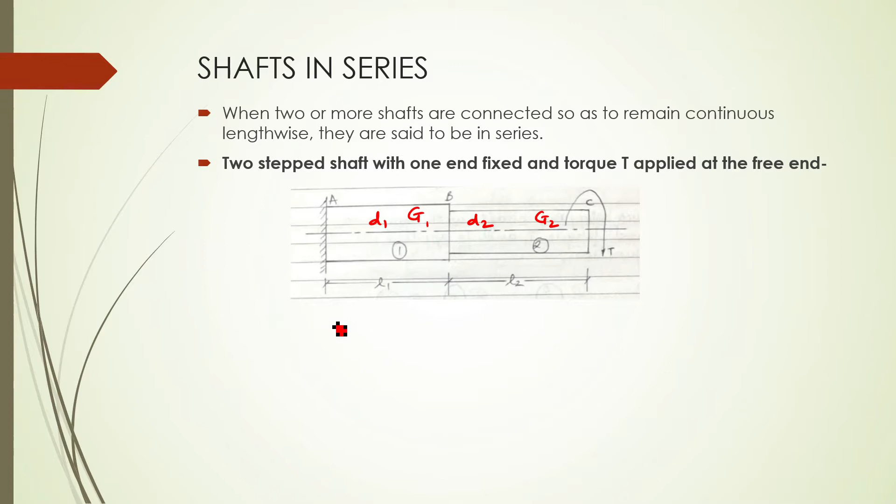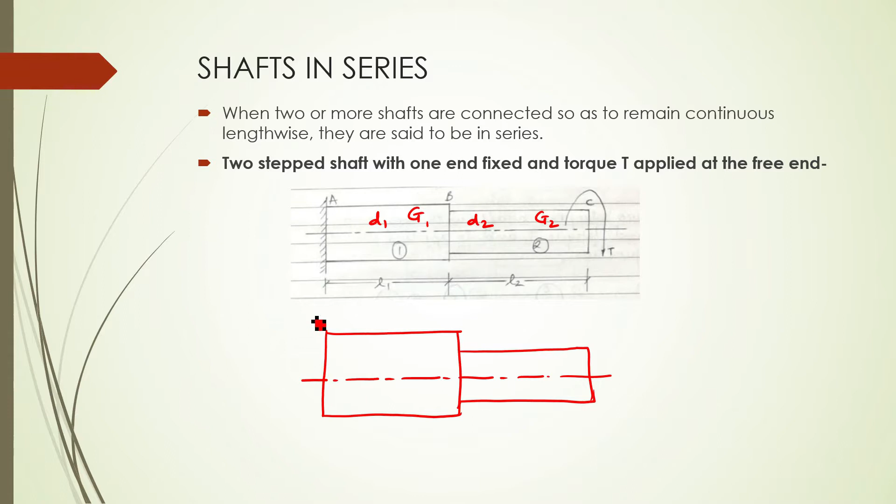Drawing FBD is very simple. This is my first shaft. And this is the second one. In FBD, we necessarily remove the fixed, hinge, roller and replace them with their reaction. In this case, when we have fixed here, I am going to remove the fixed and draw a torque, because at the other end I can see some torque T being applied. Let me say that this torque is clockwise. So the torque on this end is going to be of anti-clockwise type. So I'll write here counterclockwise.

This is A, B and C end of the shaft. This is my first shaft, second shaft. The length of the first one is given as L1. For the second one it is given as L2. Diameter is D1 and G1 is another material property that I know. D2 and G2. These are the properties known to me.

Now I want to write down certain equations so that if I have a numerical of this sort, wherein I have a shaft whose one end is fixed and on the other end I have some torque applied, I can calculate the torque exerted on the body if required. I can also calculate the angle of twist in the body and the shear stress generated in the body. The value of torque will be given to me. So the two things that I can calculate are twist and maximum shear stress. So we will see certain applicable equations for this case.

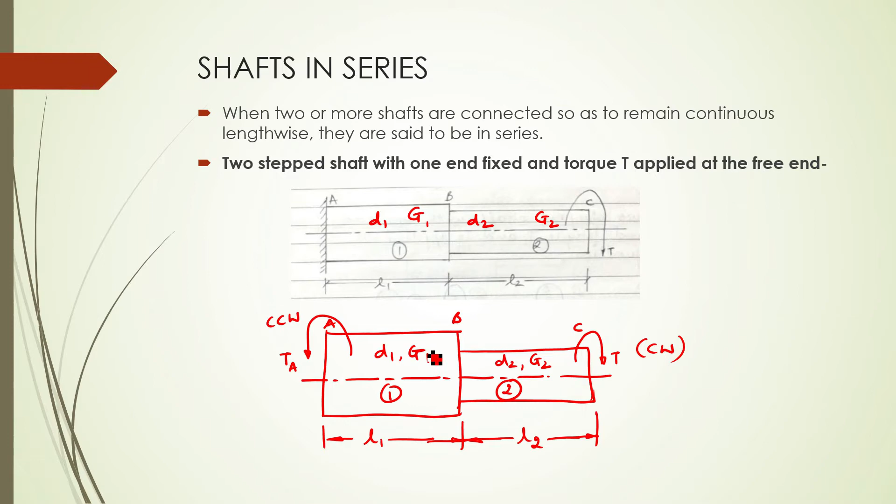The second equation that I can find here is about the twist. If you observe carefully, this entire shaft A to C will be subjected to a certain amount of twist, which will be the twist in portion AB plus the twist in portion BC. So theta AC for the entire shaft will be theta AB plus theta BC. Now we know the equation T/J = Gθ/L. So if I want to find theta, it will be TL/GJ.

When I substitute here, for the first portion this will be T L1 upon G1 J1. J is calculated as pi by 32 d raised to 4. Since the diameter is different for both shafts, I have to write it as J1 and J2. And for the second one, I'll write T L2 upon G2 J2. If required, I can take T common: T times (L1 upon G1 J1 plus L2 upon G2 J2).

Now, third, we are going to talk about the maximum shear stress that occurs on this body. First, we'll talk about the shear stress acting on the shaft 1. Now, let's recollect the equation: T by J is tau upon R. So, when I talk about tau, it is going to be TR upon J.

Now, this can also be written as T into R as D by 2 and J as pi by 32 d raised to 4. So when I solve this, this 2 and 32 gets cancelled. It is 16 which goes to the numerator, T upon pi d cube. This d and d raised to 4 gets cancelled. So this is the formula of tau that I can use.

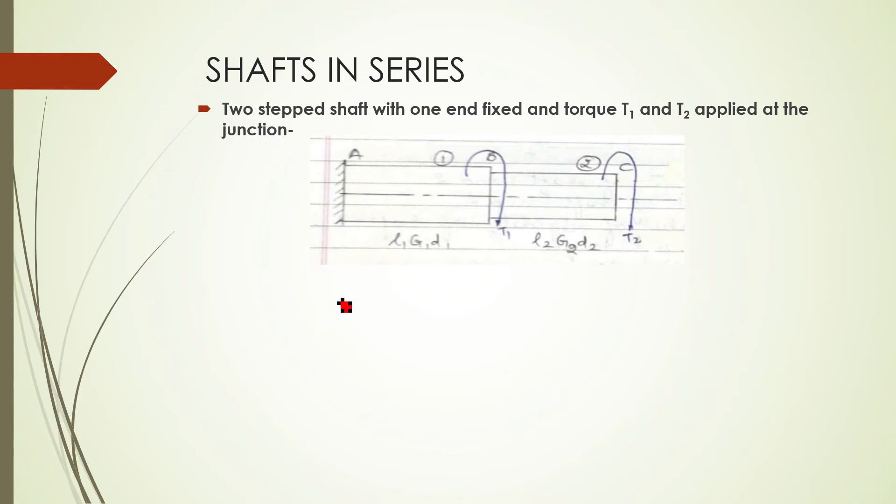So again I'm going to do the same thing. I'm going to remove the fixed end and draw a resisting torque. So this is my shaft 1, this is my shaft 2. At junction B, there is a torque T1, let me say it is clockwise. At junction C, again there is a torque T2, let me say this is also clockwise.

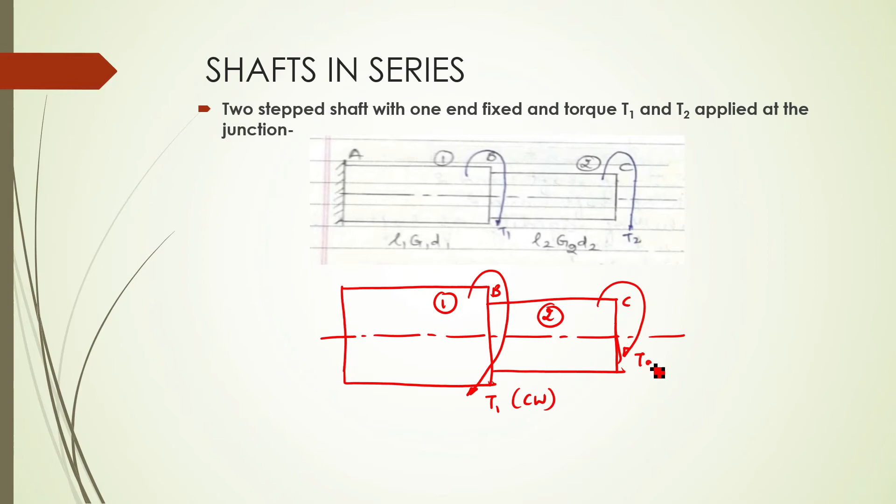So at junction A, I will obviously have to draw the resisting torque TA, which is say in anti-clockwise direction. The length here is L1, G1, D1 are the properties; L2, G2, D2 are the properties in the second shaft. Now let's write the applicable equation for this kind of a shaft. In the previous case also we did the same thing.

This torque TA will be equal to T1 plus T2. If you observe, I am using summation of torque over the entire body is equal to 0. So that is how I get this equation. That is, the torque over the entire body remains constant.

Next, I will talk about theta. When I talk about theta for A to C portion, it will be theta from A to B and then theta from B to C. The formula remains the same. So it is TA for the first shaft over here.

It is TA L1 upon G1 J1, and for the second one I can either write it as T2 or I can write that TA is T1 plus T2. So for the second one, I can write it as T2 L2 upon G2 J2. This T2, from here if you observe, can also be written as TA minus T1. So either you write here T2 or you can write TA minus T1.

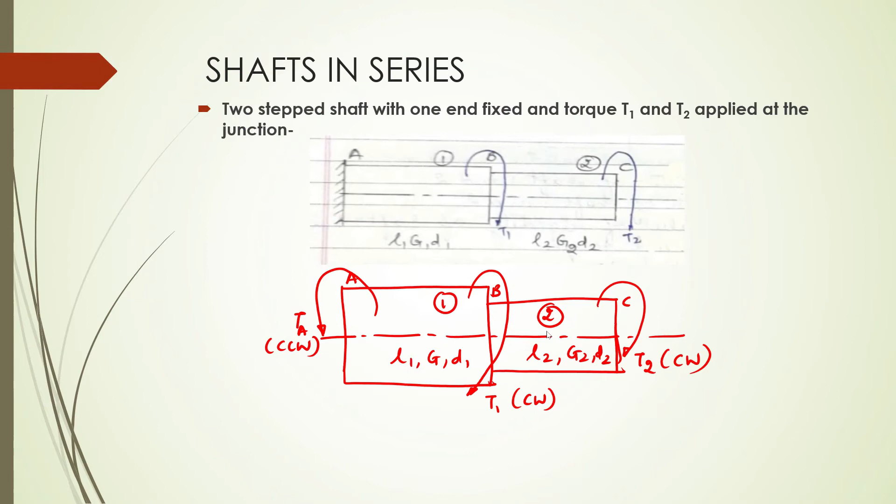Instead of T2 you can also write Ta minus T1, and instead of Ta here you can also write this as T1 plus T2. So either one of the two values can be substituted for torque. It is obviously going to be the same number. Here again you can see tau max 2 will be greater than tau max 1 because D1 is greater than D2. Next, let's go to case 3.

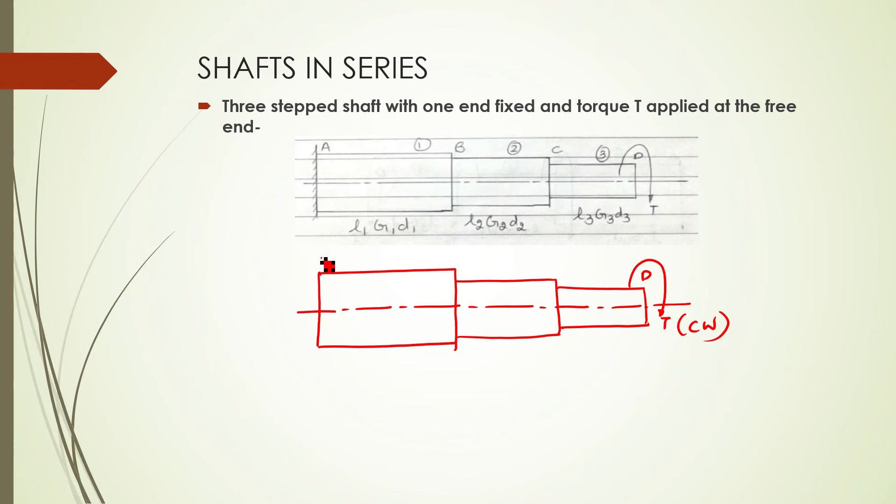Three-step shaft with one end fixed and torque T applied at the free end. So here you can see this is the fixed end and here the torque T is being applied. Now when you resolve this, you can draw the FBD. At end D, the torque is T, say this is clockwise. So at end A, there will be a resisting torque TA, it will be counterclockwise. This is shaft 1, 2, 3; L1, G1, D1 are the values, L2, G2, D2, and here it is L3, G3 and D3. This is junction B and C.

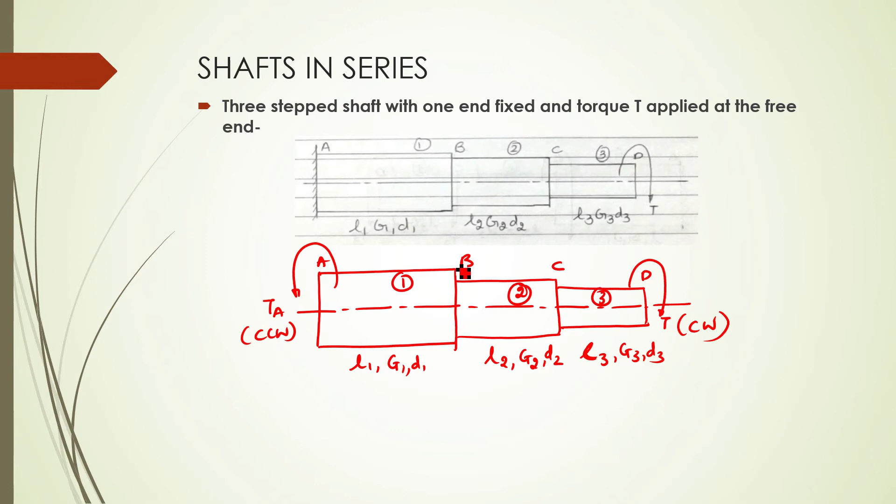Now let's see the applicable equation for this case. The first equation is TA is equal to T, because we know torque is constant throughout. The second equation is very important in this case. Just observe, the shaft is now from A to D. So the total twist will be from A to B plus twist in B to C plus twist in C to D. So I can write theta A to D is theta A to B plus theta B to C plus theta C to D. Theta will be TL upon GJ. For the first one, it will be L1, G1, J1. This is L2, G2, J2. And for the third case, it will be L3, G3, J3.

And for maximum shear stress, by now you know it, it is 16T upon pi d1 cube. For the second shaft, it is going to be 16T upon pi d2 cube. And for the third one, it will be 16T upon pi d3 cube. Now if you observe here, the third diameter is the smallest. So I can say very confidently that tau max 3 will be greater than tau max 2, which will be greater than tau max 1 for this case. Next we'll go for the last case for shafts in series.

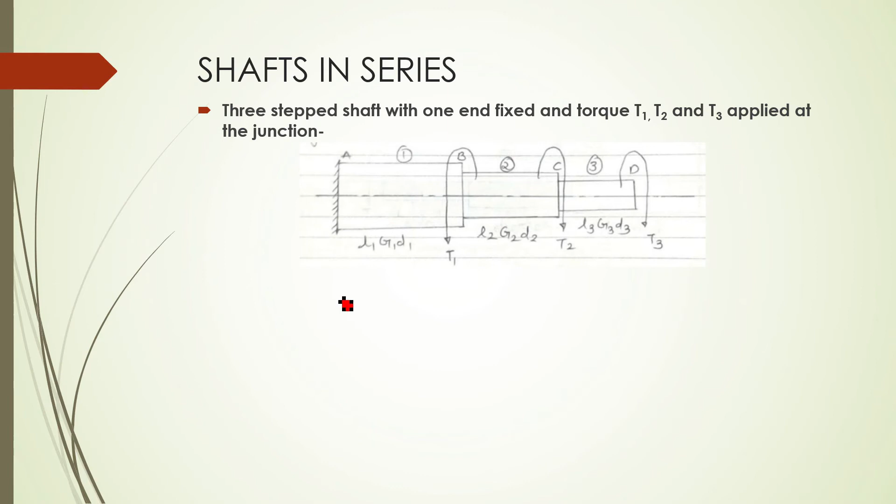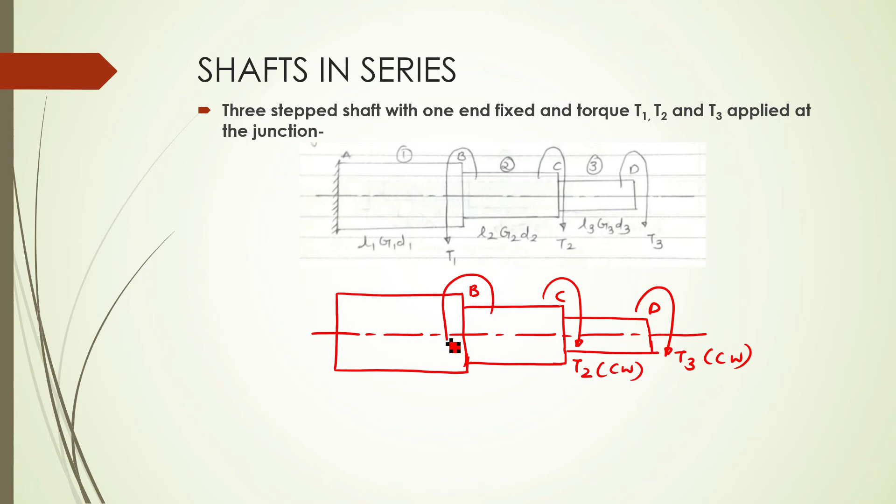Three-step shaft with one end fixed and torques T1, T2, T3 applied at the junctions. So I will again draw the FBD. At junction D, the torque is T3. Say this is clockwise. At junction C, say the torque is T2. This is also clockwise. At junction B, the torque given T1 is say counterclockwise. At junction A, I will assume the torque TA to be counterclockwise. It depends on the total value, the summation. Whatever value you obtain, you can accordingly adjust this sign. This is shaft 1, 2 and 3. The parameters are L1, G1, D1; L2, G2, D2; and here it is L3, G3, D3.

Now let's see the applicable equation for this case. The first equation that I'm going to use is summation of torque is 0. Now TA and T1 are in the anti-clockwise direction, so let me take them as positive, and T2 and T3 are in the clockwise direction, so let me take them as negative. So here I'll have TA plus T1 minus T2 minus T3 is equal to 0. So you can observe TA plus T1 will be equal to T2 plus T3. These two shift to the other side. So this is one equation that can be used to calculate any unknown value.

The next equation that I'm going to use is for theta. This equation by now is very much known to you. Theta A to D, from the start to this end, will be theta for the A to B portion plus theta for the B to C portion and theta for the C to D portion. Now, when I talk about the first shaft, you can see on one end the torque is TA. So on the other end, I can calculate the value by using this equation. TA will be T2 plus T3 minus T1. So this is one equation that I can use here.

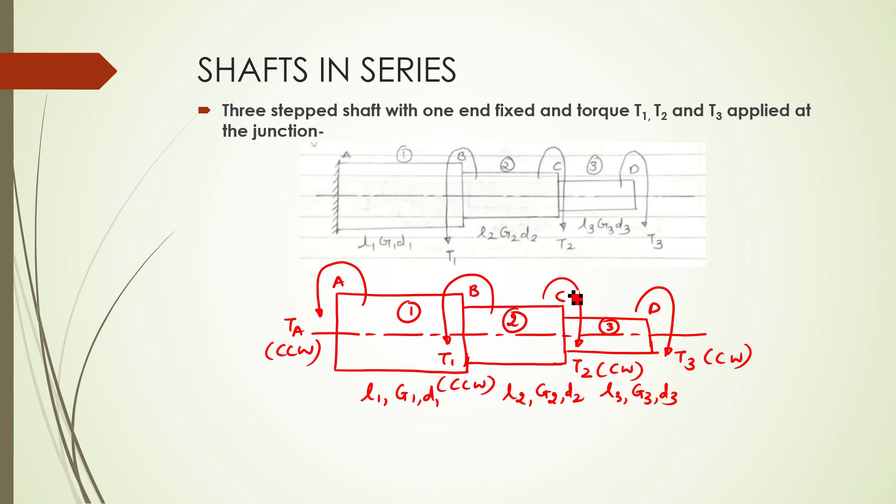Now you must be wondering how I'm thinking about this value of torque standing here. It is by using the principle of superposition, which we have already used for forces, when I can pick up a force and assume its effect over here at this junction as tensile or compressive. If you can recollect from the lectures of simple stresses and strain chapter, obviously we can do the same thing for torque. That is, standing at this junction, I can assume that this torque will have some effect on this junction. So this is one formula.

And last formula that is very much known to you is of tau max 1, that is 16. Again you can use the torque value from here, this value TA or this value. I'm writing TA for the first one upon pi d1 cube. For the second one, tau max 2, let me take it as 16 (TA plus T1) upon pi d2 cube. And for the third one, tau max 3, say I'm using this T3, 16 T3 upon pi d3 cube. If you want, you can use this equation instead of T3 as well.

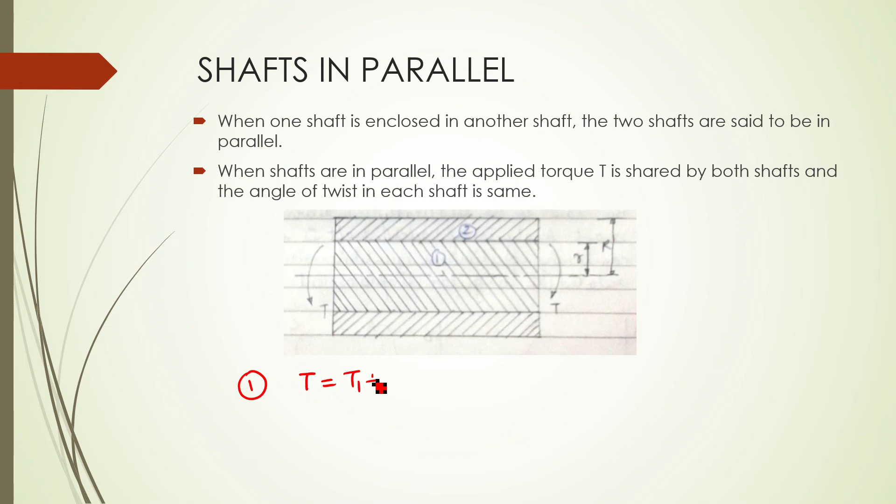So I'll write the first equation, that is this torque T will be T1 plus T2, where T1 is the torque resisted by the shaft 1 and T2 is the torque resisted by shaft 2. So this is how you calculate torque. Next equation that we are going to write is for theta.

For this case of parallel shaft, theta, that is the total twist, will be equal for both the shafts. So here it will be theta 1 equal to theta 2, where theta 1 is the angle of twist in shaft 1 and theta 2 is the angle of twist in shaft 2. And calculating theta is very simple. It is TL upon GJ. So theta 1 will be T1 L1 upon G1 J1 and theta 2 will be T2 L2 upon G2 J2. Now here you can observe that this value of L will actually be equal for both of them.

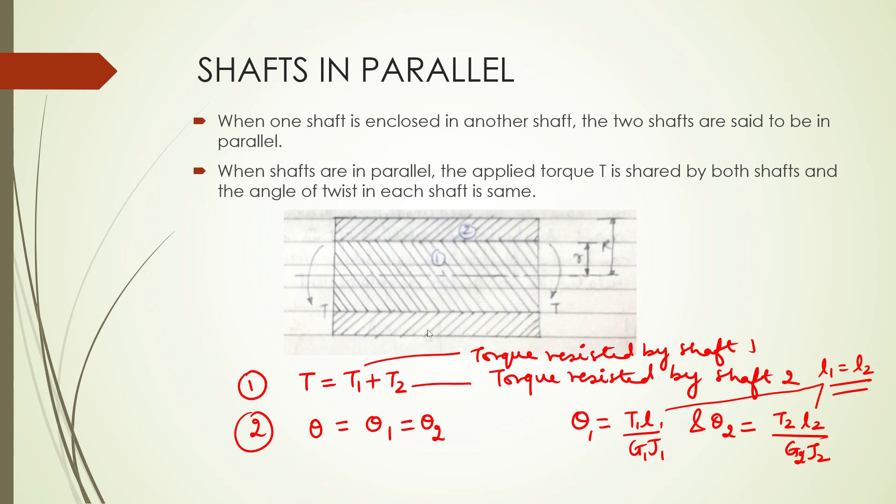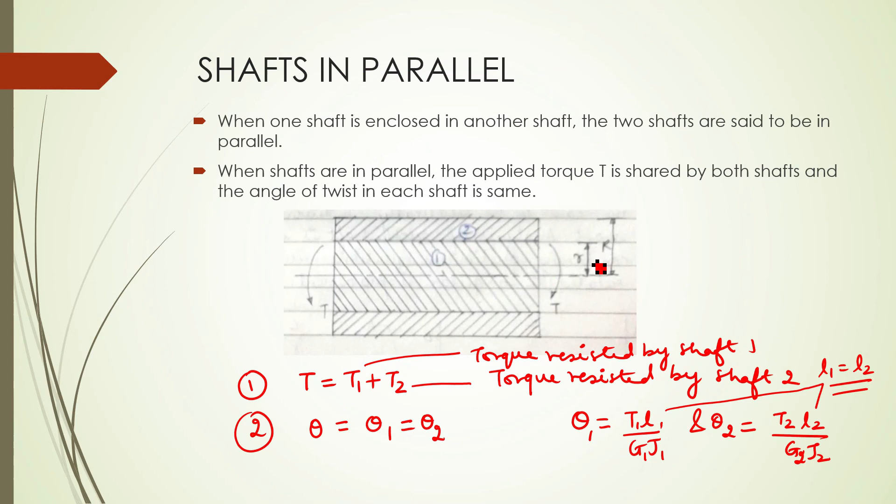And last thing that I'm going to calculate, third one, is the shear stress for shaft 1. Tau max will be T1 r upon J1. This is the formula. Tau is TR upon J. And for shaft 2, tau max will be T2 capital R upon J2. Now that is by using this diagram. For the first shaft, radius is small r, and for the second one, radius is capital R. So accordingly, you can just substitute.

So with this, I end the session on shafts in series and parallel. I hope you have understood the session.